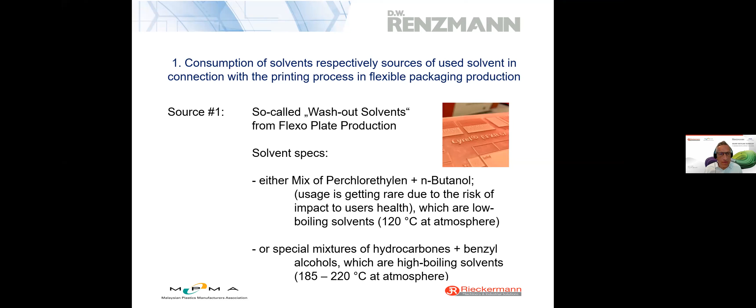So when producing such flexo plates, at the end you have used solvent which you have to handle in any way. And then the next solvent source is number 2.

It's about cleaning at the print shop. When you have finished a printing job, you have to clean the parts of a printing machine which have been in touch or in contact with the printing ink. There are 3 different ways to do the cleaning procedure.

One is manually with cloths and solvent in barrels. It's not the most modern way, of course, but sometimes it's still common or even necessary. But at the end, you have used solvent, which is contaminated with some parts of inks and some other things.

The more professional way to do the cleaning is disassembling the printing press parts and putting them in a professional explosion-proof washing machine to clean these parts, like in a huge dishwasher, with solvent. At the end, again, you have dirty solvent you have to handle.

And finally, the modern printing presses have inline cleaning systems integrated into the machine, so you don't need to disassemble the printing press parts. Using this integrated cleaning system, you flush all these parts before you start the next printing job. Again, the same solvent you have to handle at the end.

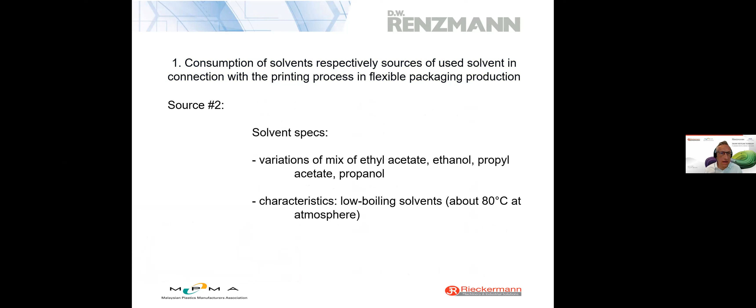Source number 3 is waste inks. Sounds a little strange, but sometimes printing inks are left over and there's no opportunity to use them anymore. You can give it away, but it makes sense to recover these waste inks to get out at least the main part of the solvent, which is exactly the same as I mentioned at source number 2 - a mix of ethyl acetate and some alcohols, with the same characteristics.

So how to handle all these solvents? Option number 1 actually is no option - I'm sure you agree with me - putting it in the drain. Of course, no option due to environmental impact.

Option number 2, return to suppliers sourcing virgin solvents. Actually also no option due to extraordinary high cost, because that would mean you just collect all the dirty solvent, give it away, and just buy new virgin solvent.

Option number 3 is a little better already - treatment by an external reclaiming company. That means you collect all these solvents, organize the transportation from your printing site to this reclaiming company. They treat the solvent and you get recycled solvent back.

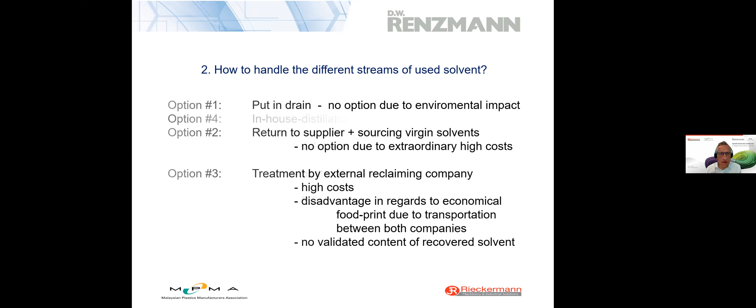So coming to option number 4, which is the best - it's an in-house distillation. You keep your dirty solvent at your site, you operate the distillation system, which handles all your dirty solvent.

The best is even to do a hard pipe connection from the printing press, from the washing machine, from some solvent containers to that distillation unit. At the end, we have recycled solvent you can directly reuse for washing and other applications again.

Then you have validated content of the recovered solvent because you just treat your own solvent in the cycle. You have a little loss because the most modern distillation units operate with a recovery rate of 98%. You have a little loss you have to compensate, but much less than option number 3.

It's the best possible economical footprint, and ROI is less than 2 years at a solvent consumption of 30 tons per year or even more.

So how does a professional distillation system look like in principle? Actually, it's like a distillation vessel, double-walled, heating at the bottom or even at the side. There are different designs available on the market. The heating of these systems is mainly done by electricity, sometimes also steam or thermal oil.

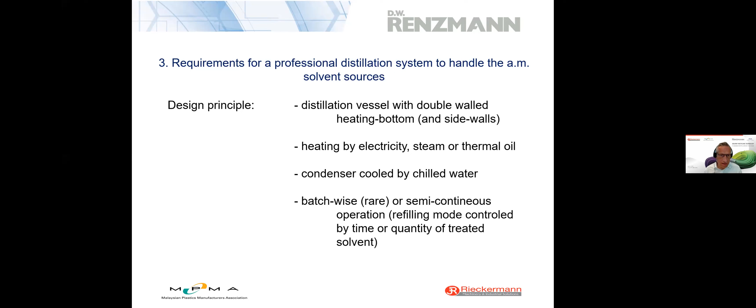The essential part or component of a professional distillation unit is a vacuum system. So we distill these solvents under vacuum to reduce the boiling temperature of the solvents. That's the reason I mentioned the boiling temperatures in the beginning at atmosphere.

When we speak about distilling solvents in the printing industry, especially in packaging printing, these solvents contain inks. Most of these inks are solvent-based, and a lot of these inks are nitrocellulose-based. Nitrocellulose is a temperature-sensitive component, so we have to be careful about this.

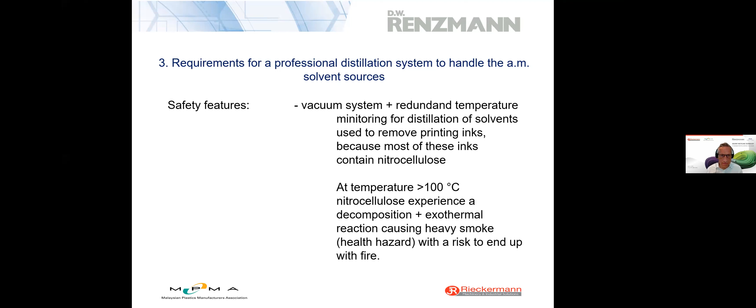In addition to vacuum, we also recommend putting an NC safety package, nitrocellulose safety package, on the distillation system. Of course, the distillation unit needs a temperature control system, but the nitrocellulose safety package has an additional redundant temperature monitoring system, which constantly monitors the temperature inside the distillation unit, especially in the area close to the heating surfaces, to avoid exceeding 100 degrees Celsius.

In case, for any reason, the temperature exceeds the limit of 100 degrees Celsius, this NC safety package switches off the distillation unit, meaning switching off the heating. When an exothermic reaction has already started because of nitrocellulose and the temperature rises even more, this NC safety package starts something like a water flooding of the inside of the distillation vessel, because water can stop a nitrocellulose reaction. But this is all under control. This is just a safety package we recommend for a distillation unit in the printing industry.

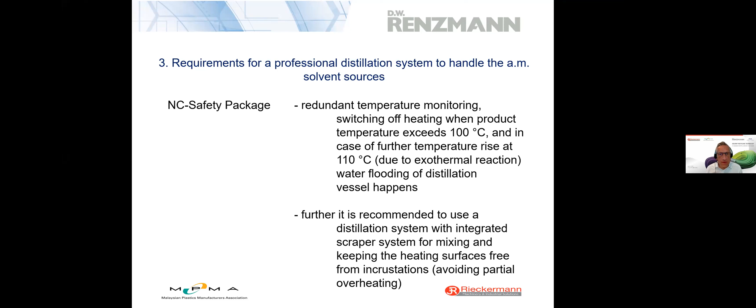So how is a professional distillation unit set up? Remember, I told you it's a cylindrical distillation vessel with a heating bottom and a scraper system. I will start it later so we can see the movement. The scraper system is an important item as well, because to avoid any partial overheating during the distillation process, or any incrustations at the heating surfaces, we recommend distillation units with a scraper system, which continuously moves the product to be treated and avoids any incrustations at the heating surfaces.

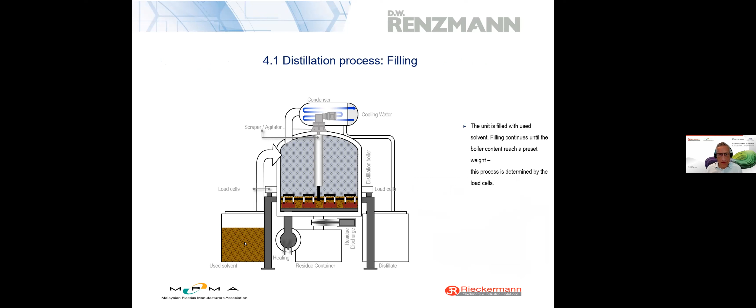Next to the distillation unit, we have a container with used solvent, and we fill up the distillation unit under pressure. By under pressure, we suck in the dirty solvent to fill up to here. You see, it's not filled up to maximum. I will tell you later why.

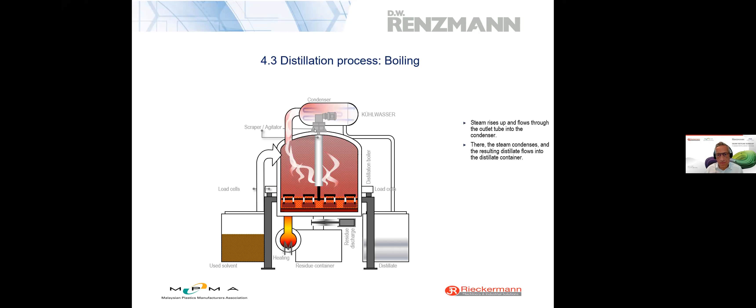Okay, then we heat up the complete system, and while boiling, the vapors rise up to the condenser. And the distillate drains out as liquid inside the distillate container.

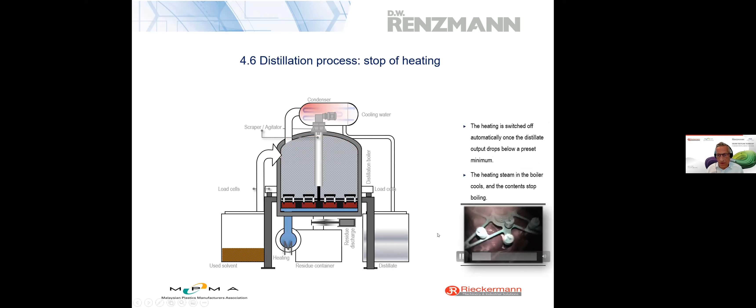So this is the end of the distillation process after we have switched off the heating mode. This is what is left inside the distillation system. I will start again, so it's very short. It's quite impressive, I think.

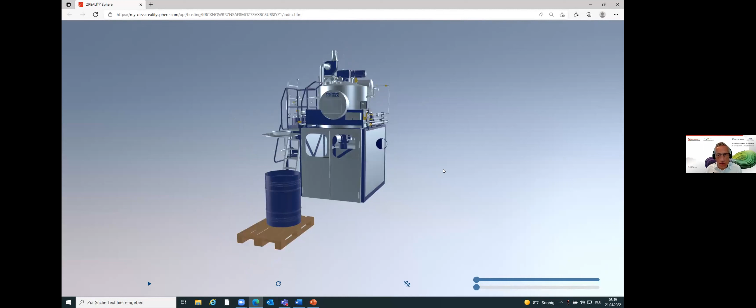You maybe remember the schematic animation of the distillation unit. Now this is a presentation based on the real 3D drawings of such a distillation unit, so it's very realistic. I would like to give you a short tour around the system. I come a little bit closer for you.

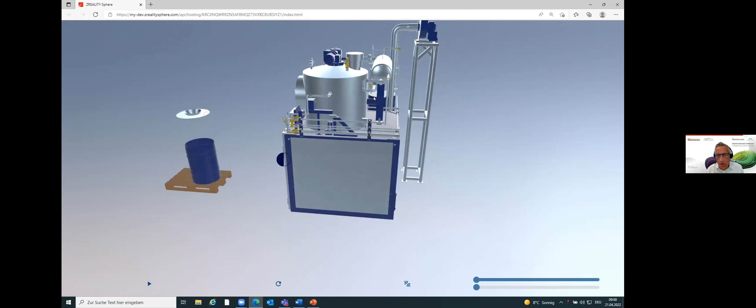You see it's just this cylindrical distillation vessel based on this frame. Turn around a little bit to also see from the rear. You see the condenser. And what is interesting at this design is the distillation unit itself, including the condenser, is mounted at this blue device. I also get a little bit closer to make it more obvious for everybody.

It's hinged in the back, but also placed on load cells here, and also at the other side. I go back to the left side. You see also here it's the other one.

That means the distillation unit controls the filling amount of solvent inside the distillation vessel, not by a filling level control integrated inside, but the unit controls the weight itself. The PLC control is preset to the net weight of the distillation unit itself, but it controls the gross weight, so it knows exactly how much product is inside the distillation unit, counted in kilograms.

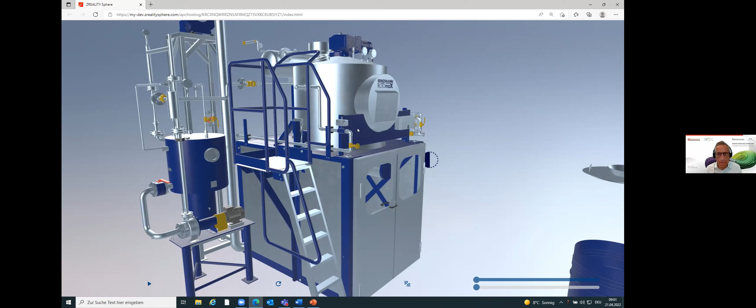Now let's see. I would like to take a view to the inside for you. It's a little bit much, so let's open like this, a little bit closer.

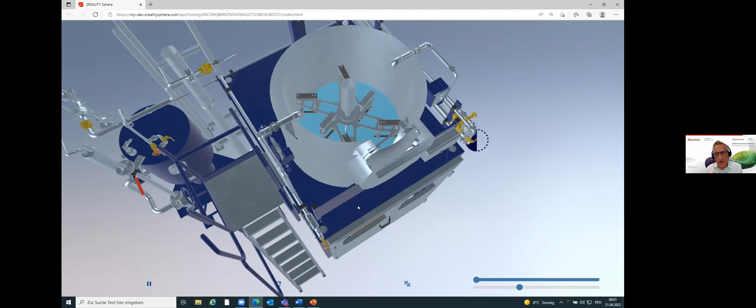You see the scraper system inside, and I also can start a very short video to make it even more obvious. This unit is closed for the residue area, so you put a residue container underneath. While the distillation process, the scraper system is rotating and maintaining the heating surface. You see it's getting dark.

That means we are collecting more and more sludge. At the end, the scraper system turns the other way around to drop down the sludge into the residue container underneath. I will give you also another view to understand even better. So I will close the unit again.

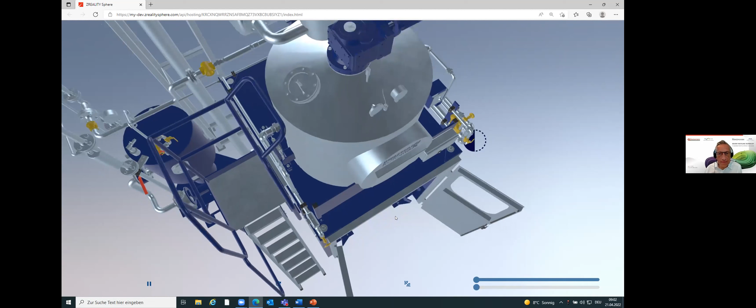Okay, I give you another view, which makes it even more obvious. So let's go from the side.

This distillation system has an integrated steam generator, which is driven by electricity. You see this yellow part in the back. So it creates its own heating steam. The steam will be guided to the heating bottom, so we just heat up from the bottom. A little bit closer for you.

That sounds a little bit like a disadvantage in the beginning, that we just heat up from the bottom, but there are sometimes also some distillation systems available on the market with heating not just from the bottom, but also from side walls. Actually, we do both, but this very modern distillation unit just heats from the bottom. Why is that an advantage?

When we speak about distilling solvents from a printing job, we have the different kinds of solvents we were talking about earlier. But sometimes, because maybe also some water-based inks are printed, we have some components of water in the dirty solvent. And distilling these solvents with a little portion of water under vacuum, in some moments, not by the complete process but sometimes, especially in the beginning, is creating some foam.

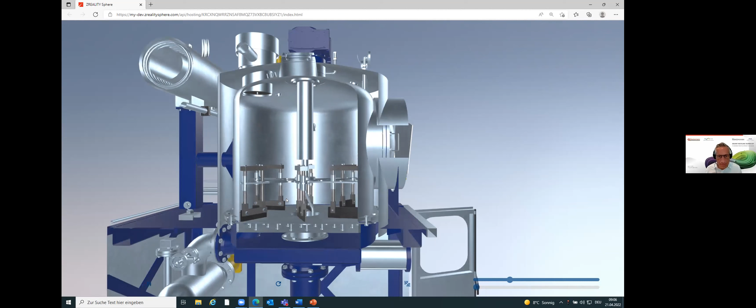But you realize that there is no disadvantage, because the heating surface is always 100% in contact with product, because there's no influence from filling height or filling amount. That's the reason we prefer to heat just from the bottom. Okay, I can start this process again for you, just to give also a view from the other side.

Okay, again we move the residue drum underneath and fill up—you see it's not filled up that high. Throughout the entire distillation process, the scraper system is rotating and maintaining the heating surfaces.

At the end, we turn the other way around to move the residue to the center. In the center, we have a gate valve which is opened to drain or drop down the sludge to the drum underneath. Okay, good, I will close the unit again.

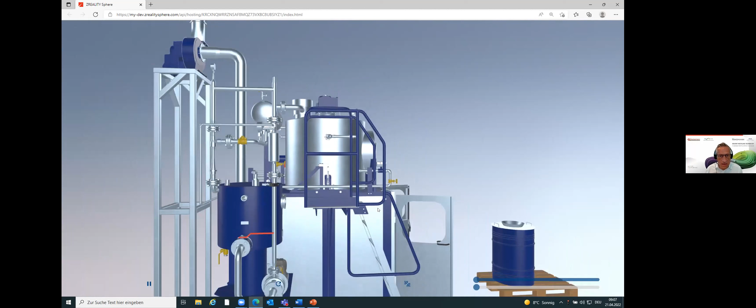There's another part of a distillation unit I'd like to show you, because I addressed it very intentionally and in detail in my first presentation. It's about vacuum—this is a vacuum system. Actually, the vacuum system is just a small cylindrical container filled with clean solvent, the same solvent mix we are treating, and a centrifugal pump. This pump just circulates clean solvent through this pipe up here, through this pipe, and back to the container.

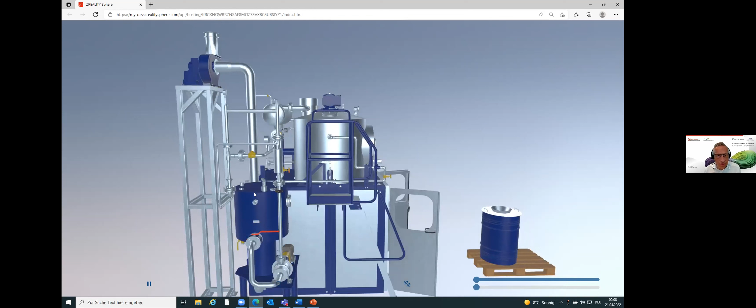That doesn't sound so spectacular, but I'll show you why it's so important. Let me go a little closer to make it more obvious. Okay, here we are—you see this very small pipe. This is a Venturi nozzle pipe, meaning the solvent stream goes through this Venturi nozzle pipe and back to the container. The Venturi nozzle pipe has a wide opening and a very narrow opening.

Close to the very narrow opening, the flow speed is very high, but there's under pressure. We use that under pressure as a bypass to connect to the condenser, and from there to the distillation unit. So this creates our vacuum.

This vacuum unit design is certified according to European ATEX certification and requirements, because there we don't move anything mechanically in a mix of liquid solvent and solvent atmosphere. There are other vacuum designs available on the market based on a liquid ring pump, but a liquid ring pump operates and moves something mechanically inside the pump in a mix of liquid solvent and solvent atmosphere. So there's a risk of explosion, especially with solvents with a flash point less than 55 degrees Celsius.

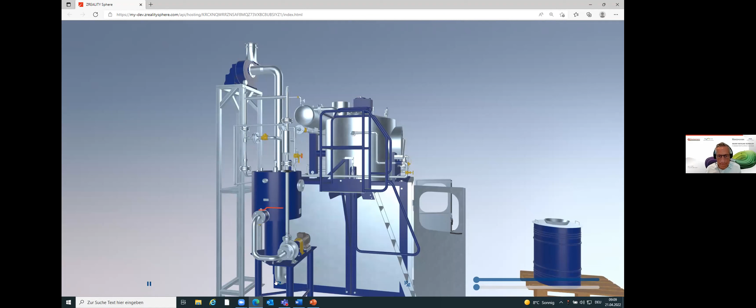Okay, I would like to go back to my first presentation.

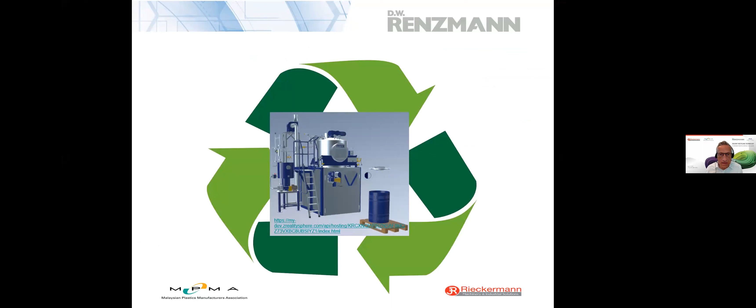So this is what I wanted to show you about liquid solvent distillation. Let's go back to the beginning—we were talking about sustainability. Saving rare resources means saving solvent, means treating or recycling the solvent as much as possible. Again, recovery rate is 95 up to 98%. We were talking about improving environmental footprint, meaning distilling in-house, no need for transportation, no need to invest in further resources, and of course saving money. Remember, ROI less than 2 years.

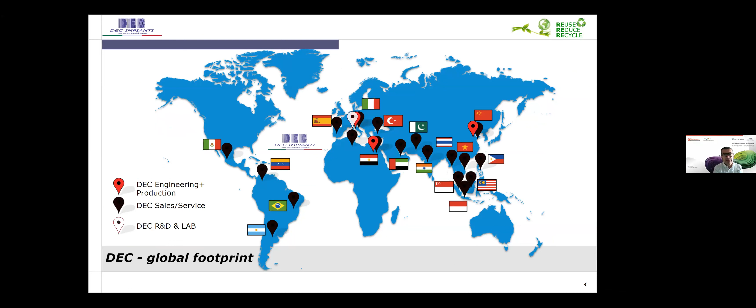DEC is an Italian, family-owned company, and we recently celebrated our 75th anniversary last year. So it's a long story of innovation and technology. We are present all over the world in different countries. Specifically talking about Southeast Asia, we are a partner of Rieckermann, who is our agent for the entire Southeast Asia. DEC has a workforce of around 250 people, working across engineering, R&D, and of course in our workshop.

So let's start immediately to talk about our target.

When we talk about sustainability, we mainly face three main issues that our customers also are facing every day: taking care of the VOC emissions, CO2 and greenhouse gases, and trying to minimize the excessive use of Earth's natural resources. So how do we face and solve these three main issues?

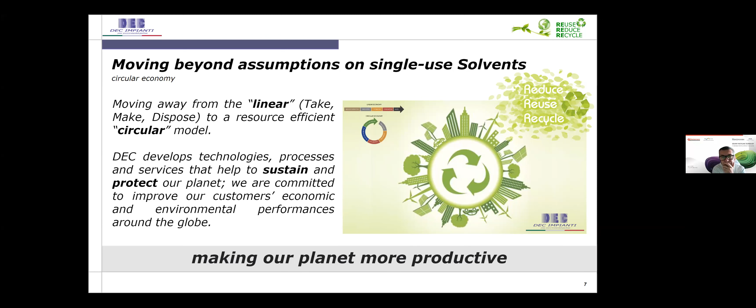Let's say that we typically look to switch from the old concept of using our solvents one time and losing them, like releasing them as emissions to the atmosphere, or even worse, burning them with oxidizers, RTOs. We want to move to a circular economy.

DEC in this field is a worldwide leader in solvent recovery systems for flexible packaging. We have installations worldwide in every country, and we are really the world leader when it comes to solvent recovery systems for the vapors exhausted from your printing and converting lines.

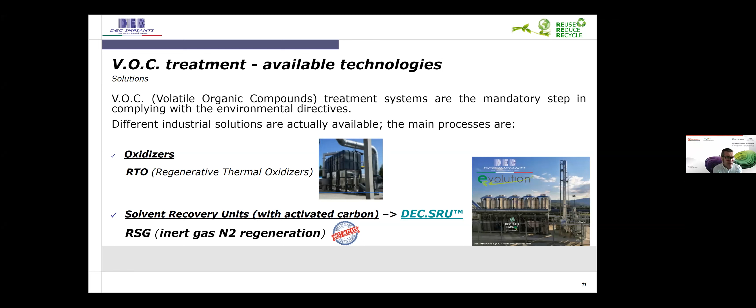So let's talk about when I have to face the problem I mentioned before, how can I treat the VOCs generated by our converting lines. There are mainly only two alternatives in this market: one is to use the RTO, to burn the exhausted solvents from our converting lines, the other is the solvent recovery units, which is the core business for DEC.

This slide shows the two alternatives again. On one side, the RTOs are just contributing even more to create emissions, because when we burn our solvents, we increase the emission of CO2 and other greenhouse gases. The solvent recovery, on the other hand, is aiming to protect the environment, to recover the solvent and to avoid emissions to the atmosphere.

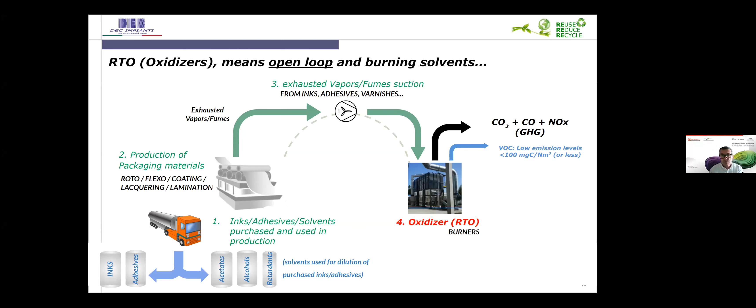We send this air with the solvents to the solvent recovery unit. We recover, we condensate and recover - we'll see more details later - these solvents into liquid solvents that we can reuse for infinite times as a diluent for our inks or adhesives. So this is really a closed loop system, which doesn't have all the disadvantages given by the RTO.

I don't want to lose too much time because there are much more interesting slides later on, but the only advantage the RTO concept sometimes has is that the investment cost for an RTO is lower than a solvent recovery system, but on the other side you have a lot of disadvantages. The only reason to go today, with the crazy price of raw materials, with an RTO is only when the mixture of solvents used on our converting line is not recoverable, which is a very rare case.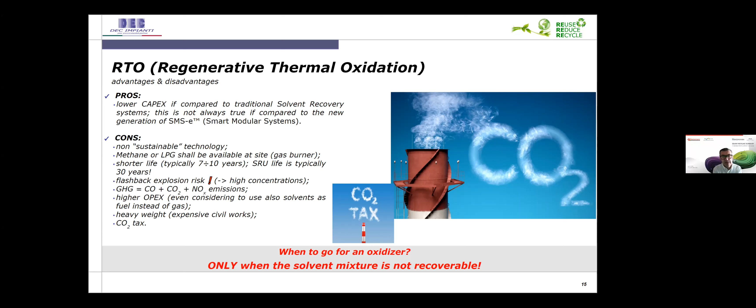I mean, typically, even the mixture of solvent used on our converting line is recoverable. We will see later how.

Then I think everybody knows that there is the target to go totally green by 2050, even before in some regions, by 2030, and the countries where this target is very sensitive are putting more and more CO2 tax. So you can imagine with an RTO, if I contribute even to generate CO2 - for example, in China today the regulations are against the use of RTO, and customers have to find alternative solutions to get rid of this CO2 generation. And so we are expecting in the coming years that the CO2 tax will increase more and more, especially in Europe, but not only.

So it's possible that European countries will apply a CO2 tax on top of goods imported from countries where this green target is not followed.

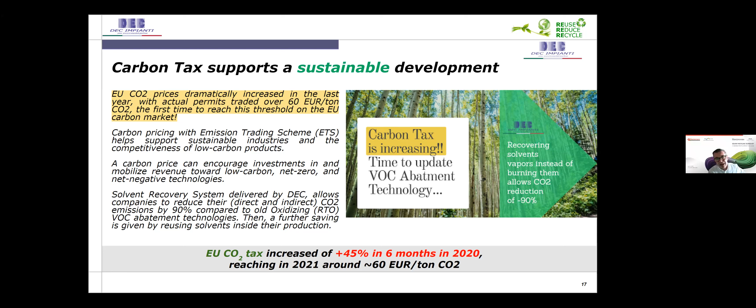So it will become a global problem.

Using RTO, there are calculations we can go more deeply into, but just to give you an idea: when I use the RTO, I generate a tremendous amount of CO2. For example, when I need to produce 1 kilogram of additional ethyl acetate to use for dilution instead of recovering it through solvent recovery, I generate 2.3 kilograms of CO2 in the production process. Another 2.3 kilograms of CO2 is generated during the oxidation of 1 kilogram of ethyl acetate. And then to run the RTO, I even need energy - electric energy, gas, thermal energy. So again, I generate a tremendous amount of CO2, which only contributes to pollution of our environment.

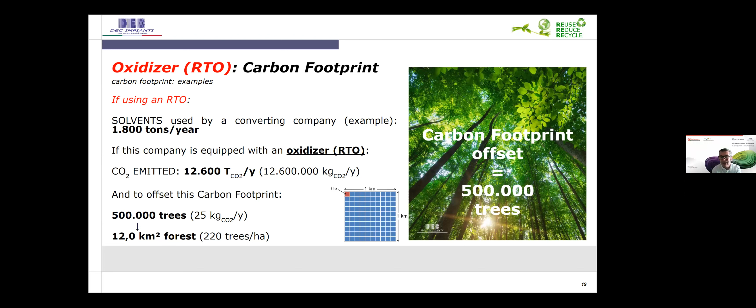This is just to show you, for a medium-sized company converting 1,800 tons per year of solvent, which is quite common, I would need a very big amount of trees to offset the CO2 generated by an RTO. So it's really amazing how the RTO is not an energy saver, is not respecting the environment, and is not convenient at all. So when it's possible, we highly recommend going to another technology.

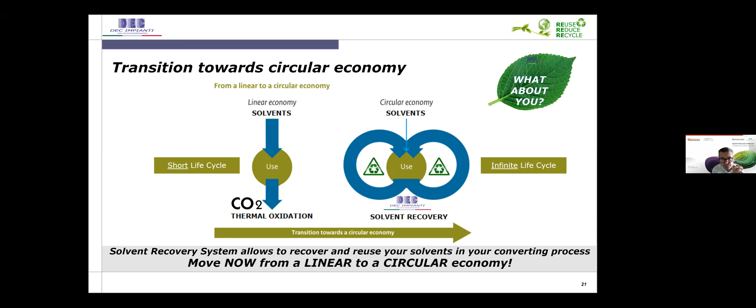So to switch from a short life cycle, from a linear economy to a circular economy, the only way, in our opinion, is to go to a solvent recovery system. The solvent recovery system, apart from the fact that you recover for infinite times the solvent that you use for dilution of inks and adhesives, will in general contribute to reduce solvent production, transportation of solvents, delivery of solvent to your plant, and cancel emissions to the atmosphere. So all these factors are impacting your pocket, the economy, the money, and the environment.

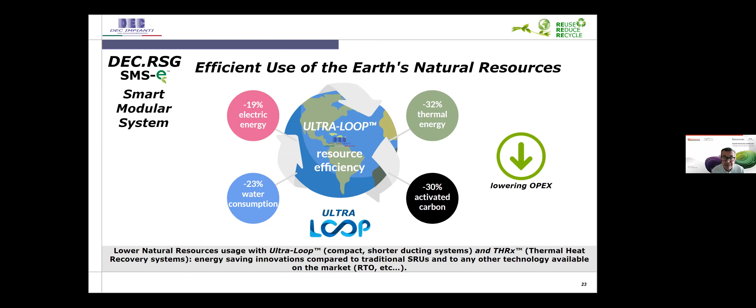With our system, we really want to minimize and have an efficient use of the Earth's natural resources. We are able, with our patented system, to reduce the consumption of electric energy, water consumption, thermal energy, and even to reduce the consumption of activated carbon, which is our main raw component used to filter the air - its use is minimized. So we really optimize our system to have the least possible consumption of energy in general.

So we started more than 30 years ago with the engineered solvent recovery system, and up to today we've developed the smart modular system, which is the latest, the state of the art in solvent recovery systems. I'll show you a short video. In this video, you will see the concept of how a solvent recovery process works.

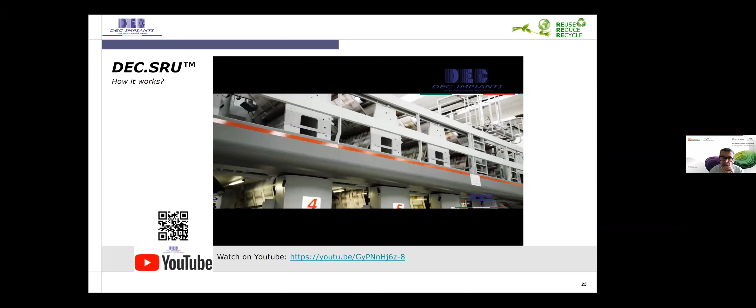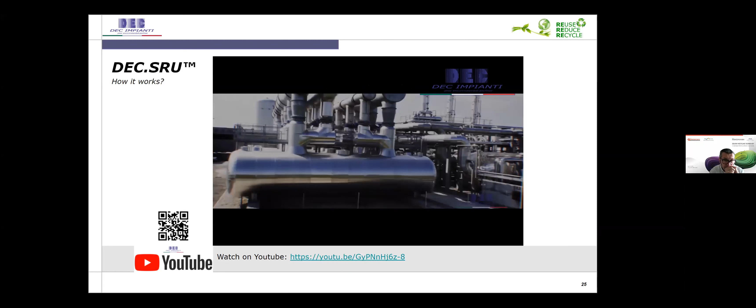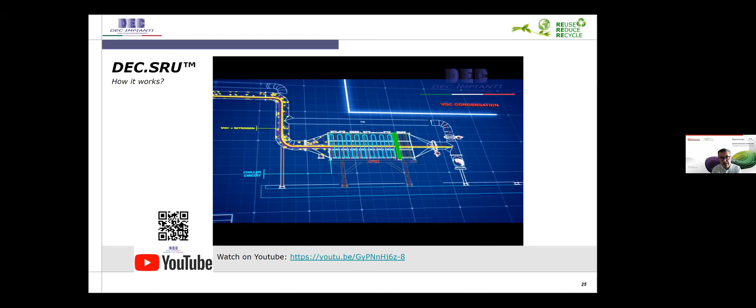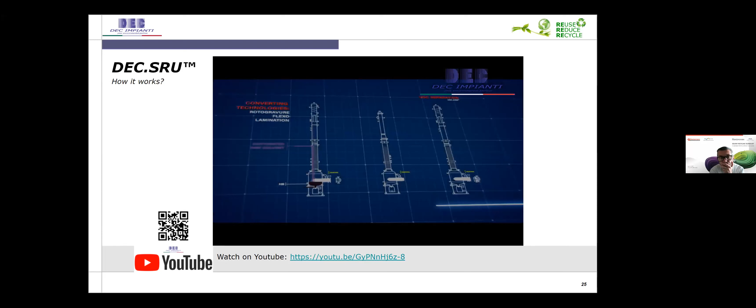So you see, starting from a printing machine - this is a rotogravure printing machine - we have an extraction of the exhaust air with the solvents. We exhaust through the main exhaust duct, which arrives at the solvent recovery unit, where we have the adsorbers with activated carbon. The air will go through the activated carbon, which captures the molecules of the solvents. After that, we have to condensate the solvents, which were still in gas form, and obtain - we have a dehydration process when necessary - to remove the excess water from the solvents. Through the distillation column system, which could be from 1 to 3 or 4 distillation columns according to your configuration, we can even separate the solvents individually when necessary.

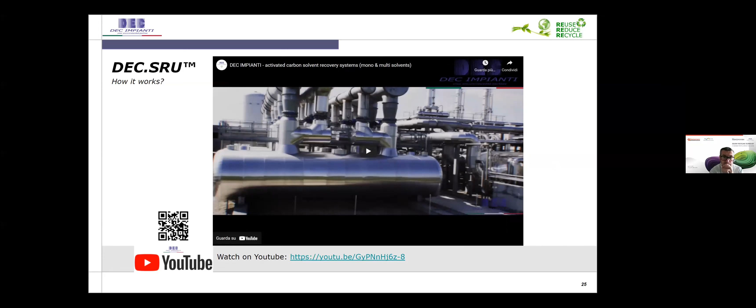In 2021, we developed the 4th generation of our smart modular systems, which is the state of the art of solvent recovery. As I told you, the first smart modular system series was born in 1998, the second one in 2008, while the third one was developed in 2018.

So the main targets are to improve performance, to minimize the consumption of energy, to have a fast delivery time and installation, and to lower the capex also for this kind of system.

Okay, this is showing the core of the solvent recovery system of today. So if you follow the yellow arrows, you see that the skid-mounted system, which is a pre-assembled structure in our workshop, will receive the SLA air - the exhausted air coming from our converting line - and through a filtering room and a temperature conditioning room, because typically we bring the temperature of the exhausted air to 35 degrees Celsius, we blow the air through the activated carbon, which is in the adsorbers on top of the skid.

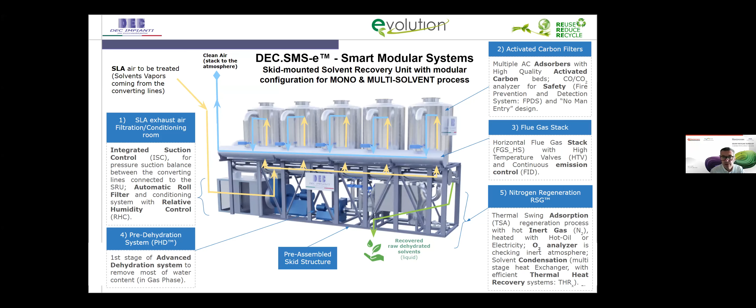The solvent recovery system, as we said before, uses some energy to cool or to heat up during the process. This can be done with two different versions. So we have a full electric version using only electricity to heat up when we need to heat up, for example, the nitrogen during the regeneration. The system is using only electricity, nitrogen, some water, and compressed air.

While we have the same system using hot oil. In this case, of course, typically you need a boiler if you don't have spare capacity. So you need a boiler to have the hot oil. Again, some electricity, nitrogen, water, and compressed air.

So both versions are available. And for us, it depends mainly on how much it costs electric energy or thermal oil to be produced country to country, because we have different situations.

Talking about the full electric version, we can say that on site we are really what we call zero impact. So we're not having the need to use a boiler. We really can say that we have zero CO2 emission on site.

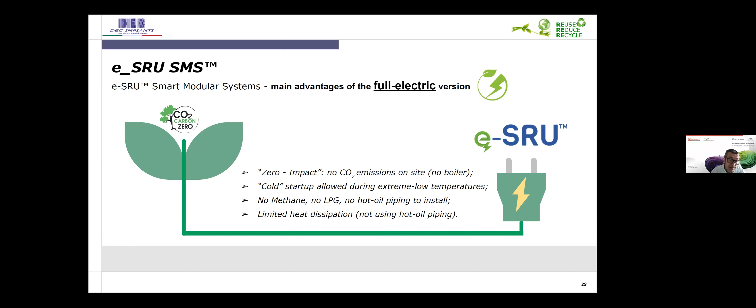We don't need to have methane gas or propane gas on site. We don't need to install hot oil piping, and with electricity we don't have any problem for thermal insulation, so we don't have the issue with the heat dissipation like we have with the hot oil. But again, it depends on country to country on how much is the cost of the energy.

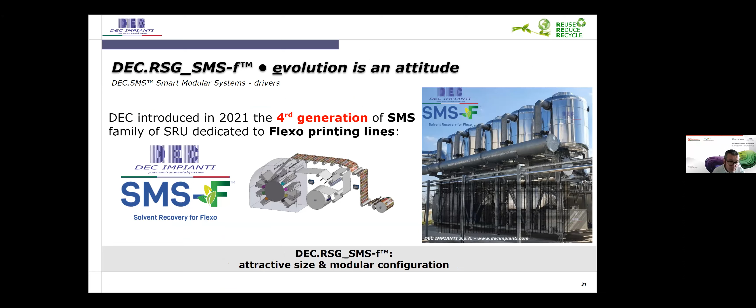Again, as I said before, we recently introduced the 4th generation of a smart modular system dedicated to the flexo printing lines. In this case, again, the concept of closed loop comes again.

I just need to purchase the inks from the market and recover the solvents that I can directly reuse in our production for infinite times. I close the loop. So this is the example dedicated for the flexo printing, which is the latest development by DEC.

In this slide, you see an example. If we have time later, I will show you a virtual tour in this plant. But let's start with this slide.

This is a typical example of the flexibility of what we are able to do today with the smart modular system. This customer based in Italy decided to install the first skid, shown in yellow on the left, and connect rotogravure and lamination to recover the solvent. This was installed 1.5 years ago.

As a second step, he decided to connect also flexo, and installed a second skid. You see that they bring the air coming from the flexo line to the main exhaust duct on the right skid. So this is one example: the customer decided to split into two different skids the exhausted air coming from rotogravure/lamination, and on the right side, the flexo line.

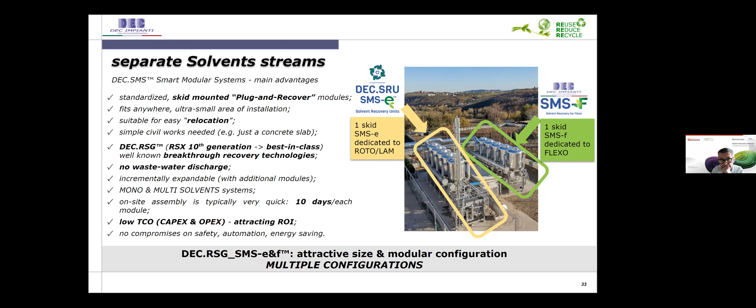This is just one of the examples, and you see that the footprint is not that big. We are talking about not a big installation. The skid you see there is more or less 14 meters in length and 3 meters in width. In the middle, they install a small shelter containing the chiller, and in front, another small skid with the distillation column to recover ethyl acetate from the solvents.

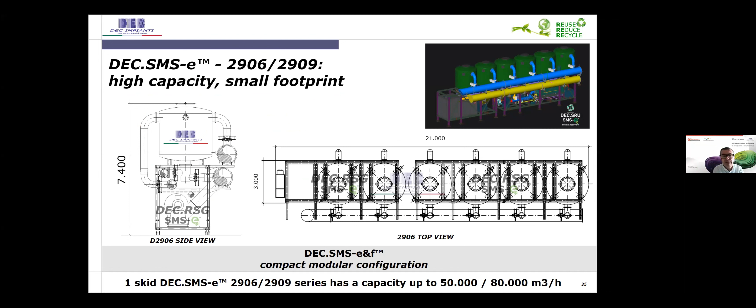But again, being a modular system, we can have another family of systems with the same concept but with a bigger diameter adsorber. For example, the one shown on the slide with 6 adsorbers on top has a capacity of 50,000 cubic meters per hour, but we have the possibility to expand this system up to 80,000 cubic meters per hour, or even more.

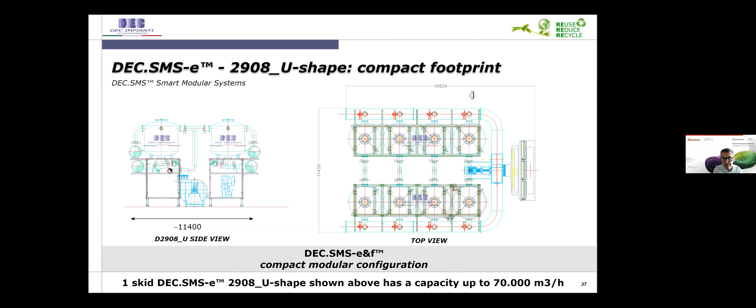This is a completely different layout that we call U-shape. The one shown on the slide, with 8 adsorbers on 2 sides, has a capacity of up to 70,000 cubic meters per hour. But again, it's just an example, because we are able to combine different numbers of adsorbers, and with additional skids you can increase more and more.

This new generation of solvent recovery was designed to be installed on a very simple concrete platform. In the area where we have the skid, we need only 2 tons per square meter — this is basically the weight you have to design your slab for — while for the distillation it could be a little higher, 2-3 tons per square meter, but we're talking about very low weight in general.

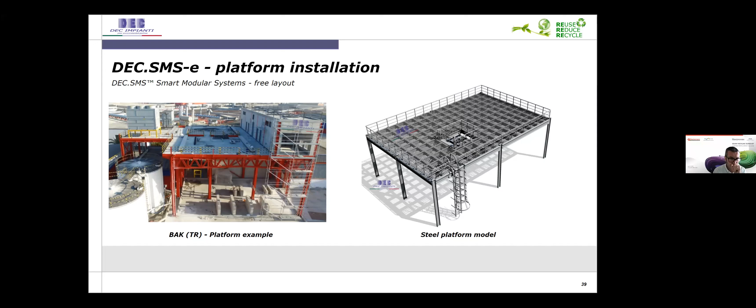The system can be installed on the ground, but also on a platform when there is no space on the ground. It can also be installed on the roof. So there are several possibilities for the installation.

So you can easily understand how short the installation time is, because when you receive a pre-assembled skid which already contains all the parts for the process, you see how easy it is to place it on the installation site, and then just put the adsorbers on top.

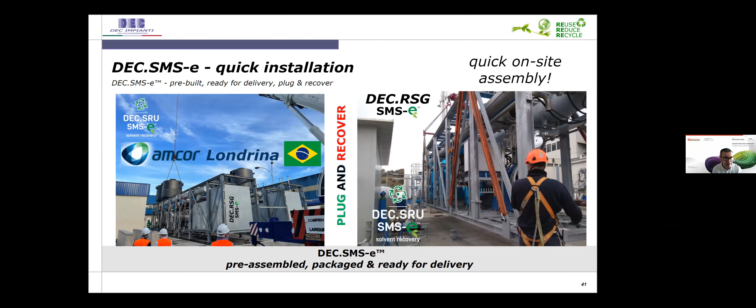These are installations going on these days. For example, one is in Brazil, Amcor Londrina, but we have several in Turkey, Egypt, and everywhere in Europe and around the world. You see on the right a slide showing that the distillation skid also comes pre-assembled and pre-thermally insulated. They just put the adsorbers on top of the skid and do the final connection.

But let's talk now a little bit about the return on investment, or the savings of our system. This slide is a comparison between RTO and the solvent recovery unit. The big advantage of the solvent recovery unit today is that from the first day we start up the system, you start to save money.

So you start to make money through the solvent recovery, because you will no longer buy solvents from the market — you reuse the solvent recovered from your own machines. So from the first day, the blue line goes up, recovering money, saving money. Typically we run this exercise every day because we have many quotations.

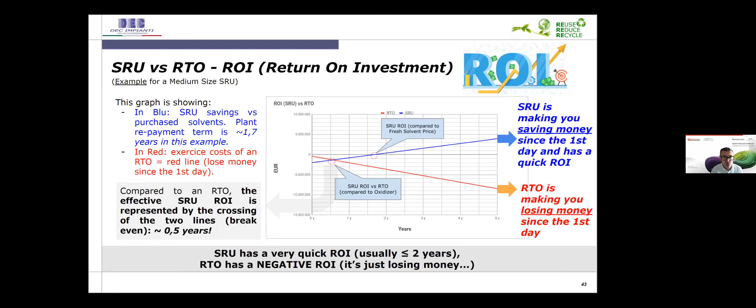This is just an example. Let's consider a company that uses in production 1,500 tons per year of solvents. Today the price of, for example, ethyl acetate can change country to country, period to period, from $1.5 up to $2 or even more per kilogram.

Since the operating cost of a solvent recovery unit to recover 1 kilogram of ethyl acetate is approximately $0.15 per kilogram, for a company using 1,500 tons per year, it's easy to calculate that every year this company could save more than $2 million per year, depending on the price of 1 kilogram of solvent.

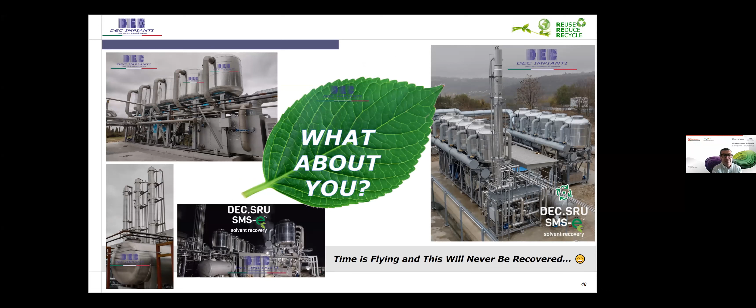So, the big question: what about you? Because time is flying, and with the solvent recovery system, we can recover the solvent, but not the time. So it's probably time to invest in solvent recovery.

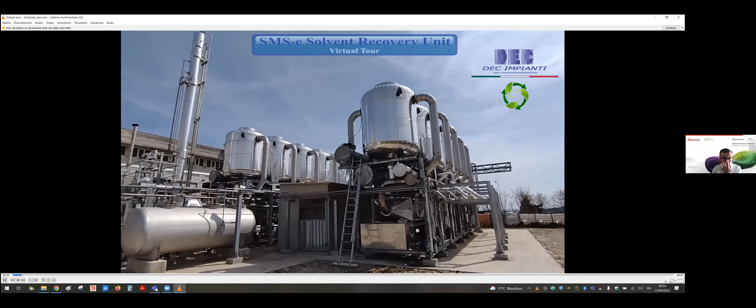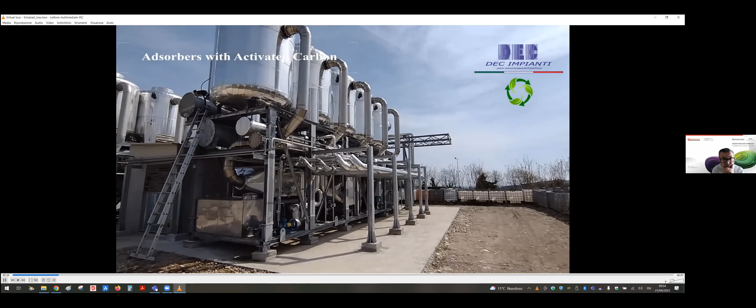This is a virtual tour of the system that we have seen before, the one I showed you consisting of 2 skids. So we go around the system. You see that it's very compact. On top, you have the adsorbers with the activated carbon. Below, you have the entire process of the solvent recovery.

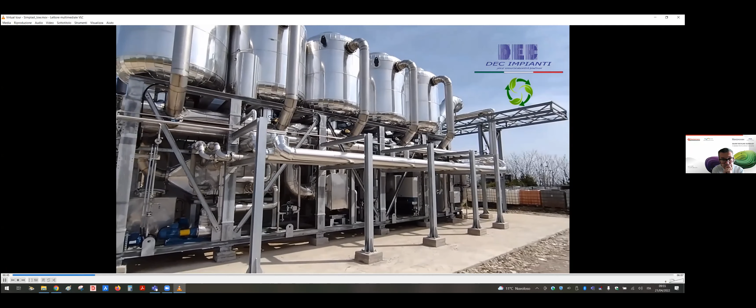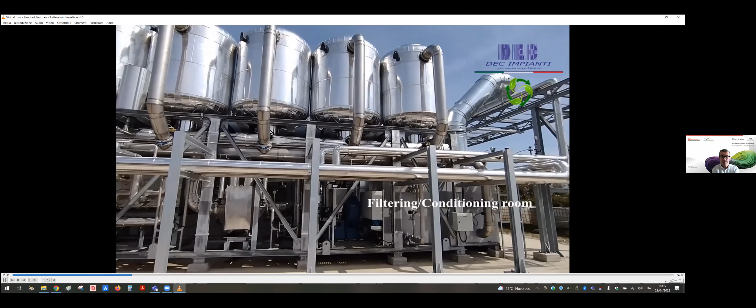We arrive now at the beginning of the process. You see on the right side, on the lower part, the filtering and conditioning room, where the air coming from your converting lines enters. We filter the air and typically cool it down to 35 degrees, and then send the air to the adsorbers on top, which will capture the solvents.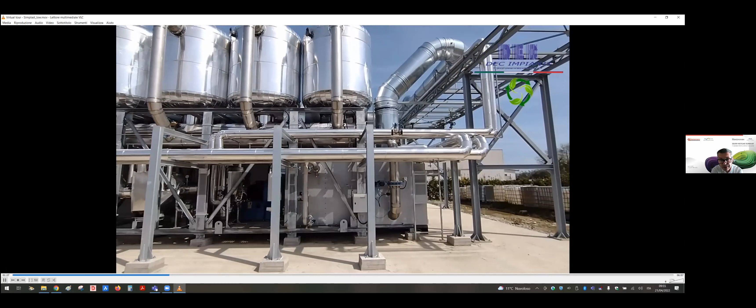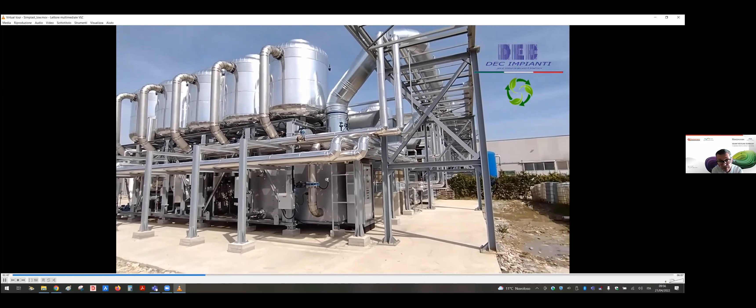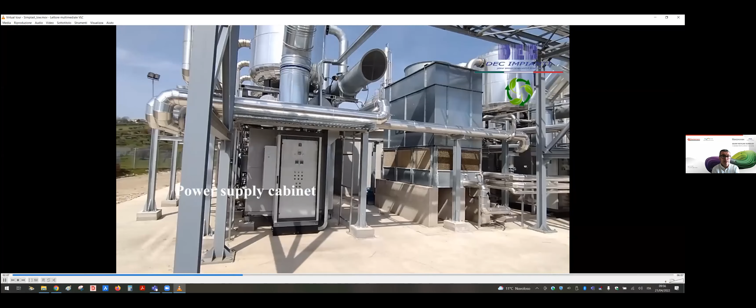We turn around now because I want to show you other things. You see on top the main duct coming from, in this case, the flexo line, because this skid on this side is dedicated to the flexo printing lines. Here below we have an electrical cabinet for the power supply. On top, you see the stack to exhaust the clean air after filtering it in the adsorbers with activated carbon. We can send the clean air to the atmosphere from this duct.

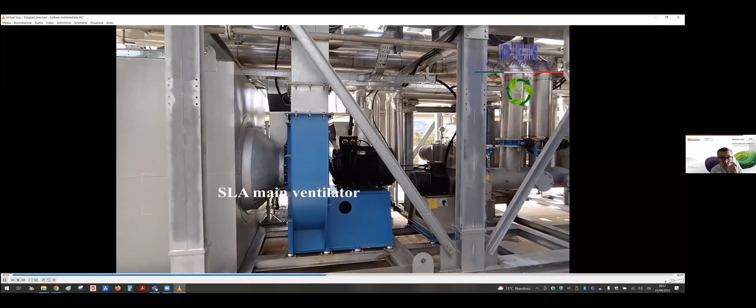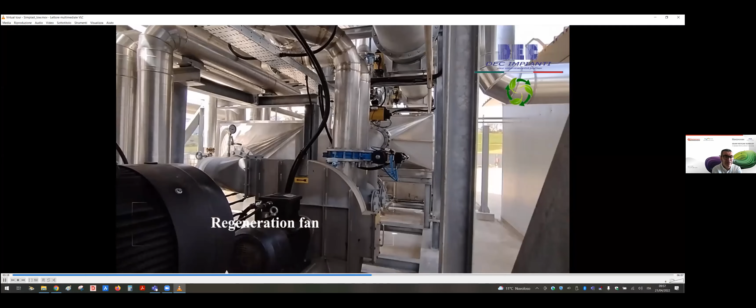Again, on your left, you see the filtering and conditioning room where the air will be filtered and cooled down. And then we find the main ventilator, this blue one, blowing the air to the adsorbers for the first process of adsorption. The one you can see over there is the fan we use for regeneration. So we blow hot nitrogen to the adsorbers to regenerate one adsorber. We have the heat exchanger and solvent condensation.

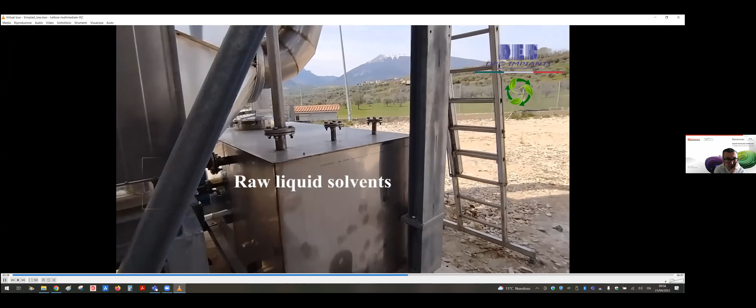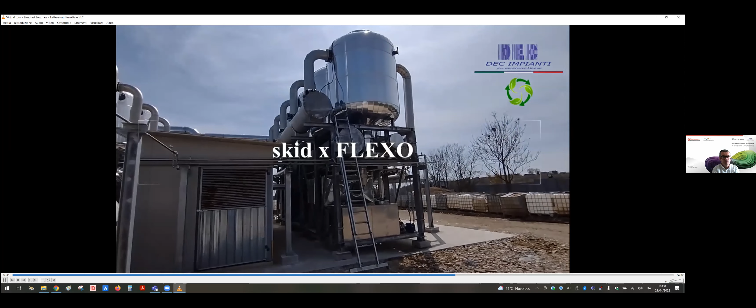In the middle between the two skids, the customer installed a small shelter containing the chiller and maybe the compressed air, I don't remember. So this one is the skid for the flexo printing. On the left, we have the skid for the rotogravure and lamination. This is the solvent tank to collect the recovered solvents.

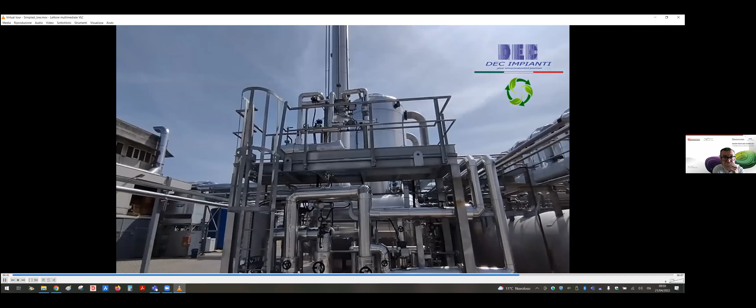On the left, we have the distillation skid, pre-assembled and also thermally insulated. We have the distillation column.